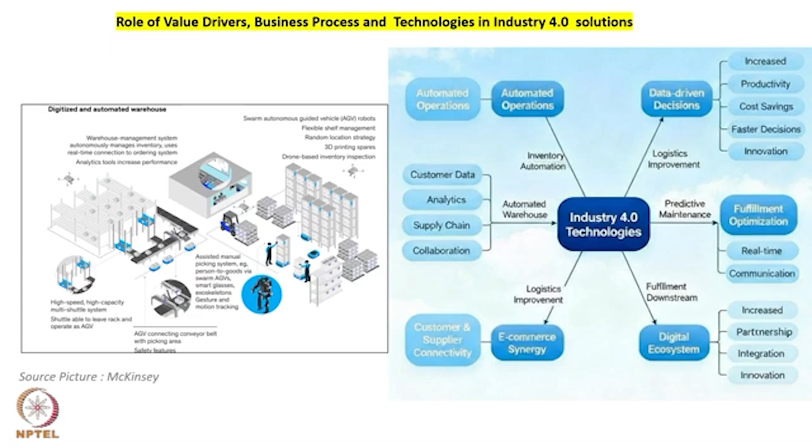So basically, in the last lecture we have seen how important the value drivers are for defining the roadmap of an Industry 4.0 solution. Now I want to summarize that first lecture in the form of what we have learned, because we are going to use this learning in today's session of designing the frameworks of Industry 4.0.

So in the first section we have learned the value drivers which I already discussed in that example: efficiency is one value driver, quality is another driver, cost reduction is the third driver, which is being enabled with the help of certain technologies like AI, IoT, predictive maintenance, etc.

Then value drivers like improving the customer experience, improving customer loyalty, and personalization. This kind of value driver is being enabled with the help of software like product as a service, or CRM, or some other technologies which you will be studying.

There is a third category of value drivers: partnership, collaboration, and innovation. For that also we have enabling technologies and methods, and one of the important methods is APIs, which connect with the partner networks.

Then another value driver is decision precision, how well we are taking decisions, whether our decisions are really going to work for the business, agility. So these kinds of value drivers are being enabled with the help of data insights.

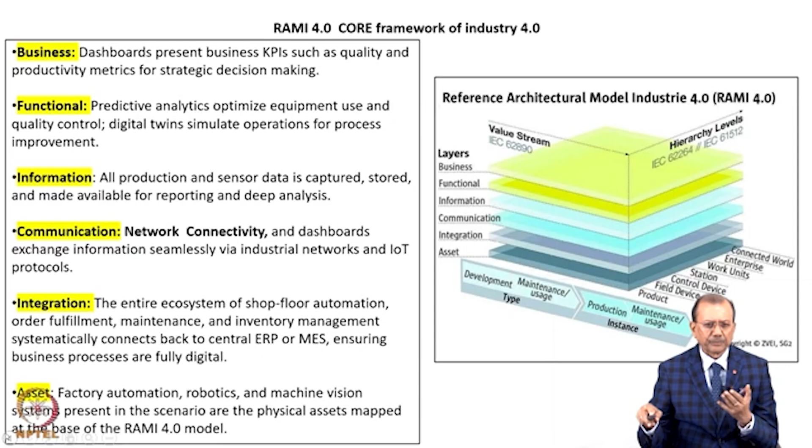So if you say you have to develop an Industry 4.0 solution, this RAMI 4.0 framework is one of the most critical and important frameworks to understand. You may have to see whether your solution is addressing all these layers or not.

So to qualify this with the help of some examples, I'm again bringing the example of automation of the warehouse, which I have already explained. If you like to plot all 6 layers, you can see what kind of manifestation of automation will happen for the automation of the warehouse - it is written in the second column.

Like in case of information, data models have to be formed, and we may also have to have optimization of the equipment. We have to optimize the equipment. Similarly, in case of functional, warehouse control system has to be used over here.

So this is an indicative list, not a complete list. Just for the sake of explaining this concept, I have put some of these processes, automation methods, enabling technologies, or Industry 4.0 technologies, and sometimes solutions, which have been listed out. So if you like to implement Industry 4.0 with the help of RAMI 4.0 for this sort of automation warehouse scenario, these kinds of actions are required. For every layer, you have to select and understand what kind of automation of processes is to be done, and then which kind of technology is more suitable.

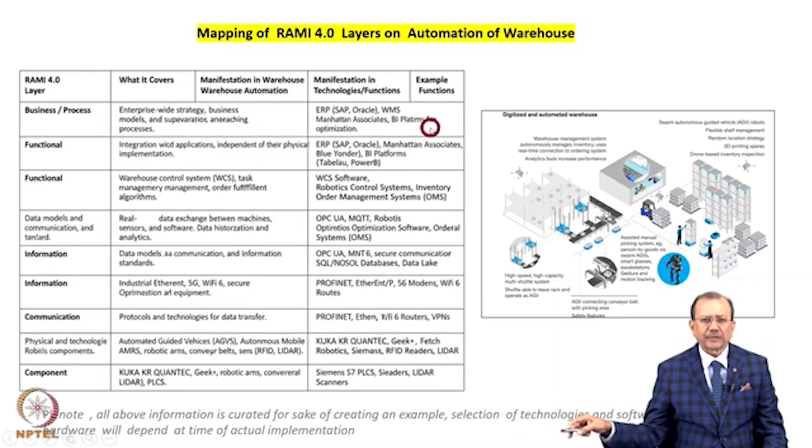Next example, using the same approach as earlier: in case we want to automate quality, safety, and productivity in a factory environment, we need this kind of technology drivers. Like in case of improvement of quality, we have to have augmented reality glasses to assist factory workers, and machine vision for predictive quality control, which is very important.

So if you like to plot RAMI 4.0 again on every action or process of this scenario, on the RAMI 4.0 layers, this kind of scenario can be understood. Like for business, we have to define the goals and value chain. For functional, which kind of application services and algorithms we want to run. For information, what kind of data models we are going to use, and data exchange protocols.

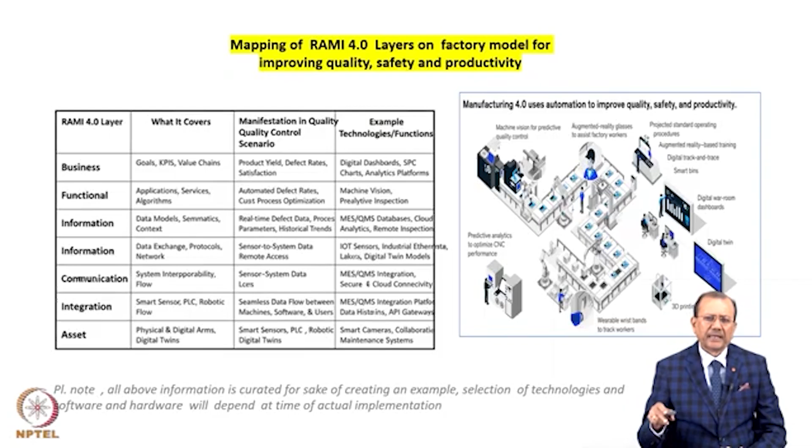So I have prepared an indicative list of what is to be covered for each of these layers, and then to enable that, what kind of technologies are required, listed in the second and third columns. Solutions, technologies, and processes are listed in the second, third, and fourth columns. So that is the implementation of RAMI 4.0. Basically, RAMI 4.0 provides you a set of guidelines: if you want to implement Industry 4.0 in any scenario of your business or manufacturing or whatever, you have to work in all these 6 layers, then only a complete solution can be arrived at.

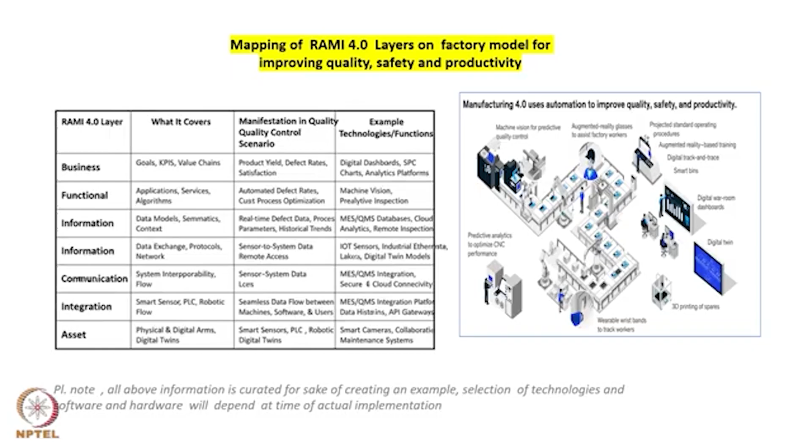Now I will discuss another very important framework, which I call the business framework. McKinsey developed this framework quite a few years back, and here McKinsey discusses the value drivers, like supply and demand match. These are the 8 value drivers which McKinsey discusses that if you like to make a framework or implement some Industry 4.0 solution, you have to work on these kinds of value drivers.

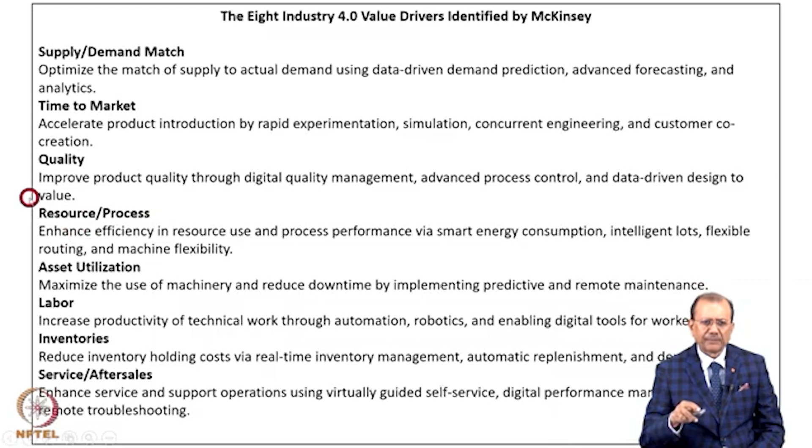So supply and demand match, time to market, quality improvement, resource and processes - we will see with examples all these value drivers. Asset utilization: maximize the use of machinery. Labor: increase productivity of technical work through automation. Inventory: reduce inventory holding cost via real-time inventory management and automatic replenishment. Service and after sales: enhance service and support operations using virtually guided self-service, digital performance management, and remote troubleshooting.

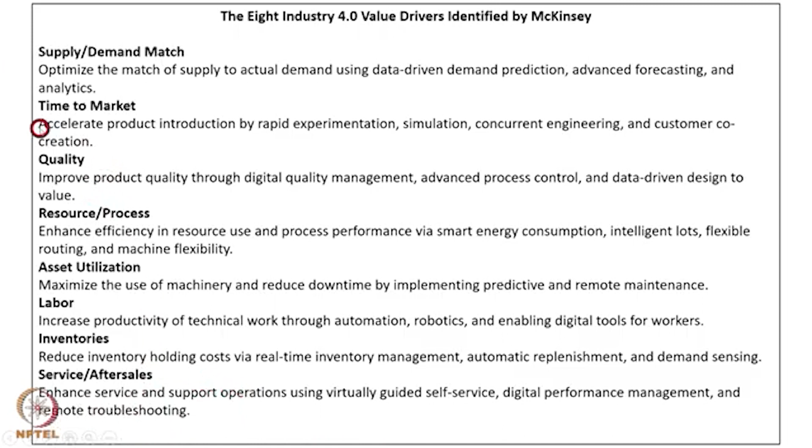These are all indicative, but these are the drivers McKinsey has provided in its framework. This is the framework which McKinsey released a few years back, and they still follow this framework. Though it's quite old, it's still quite valuable, that's why I'm presenting it to all of you. You can see there is a layer of value drivers, and these value drivers are enabled with some kind of technologies and software. So now we'll see the actual implementation.

So a simplified view of what you are seeing in this framework, I have tried to make it in table form. The value driver: supply and demand. You will see in that framework, data-driven demand prediction is one of the important levers, and how it can be enabled - with the help of AI, ML forecasting tools, and digital analytics. Supply and demand is a very important value driver. Which are the levers? Industry 4.0 levers make it important for the supply and demand match driver: one is data-driven demand prediction, and then we have some tools, S&OP and APS.

Then we have to enable this, to actualize these kinds of levers, with technologies like artificial intelligence, machine learning, or digital analytics platforms - there are a couple of digital analytics platforms available. IoT sensors will be required. Time to market: rapid experimentation, simulation, concurrent engineering, customer co-creation.

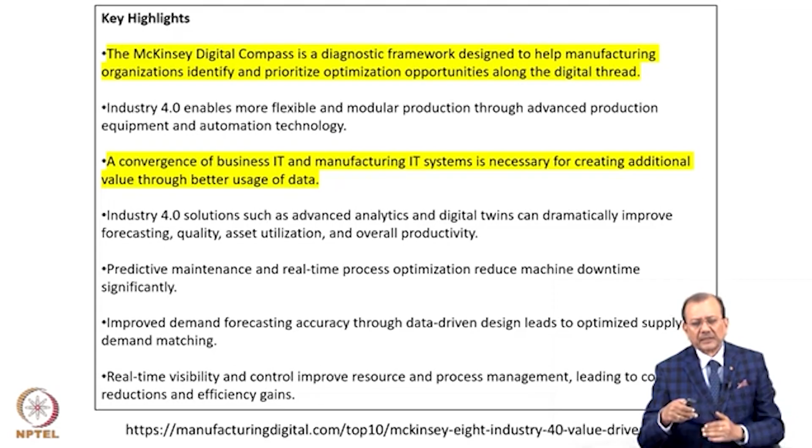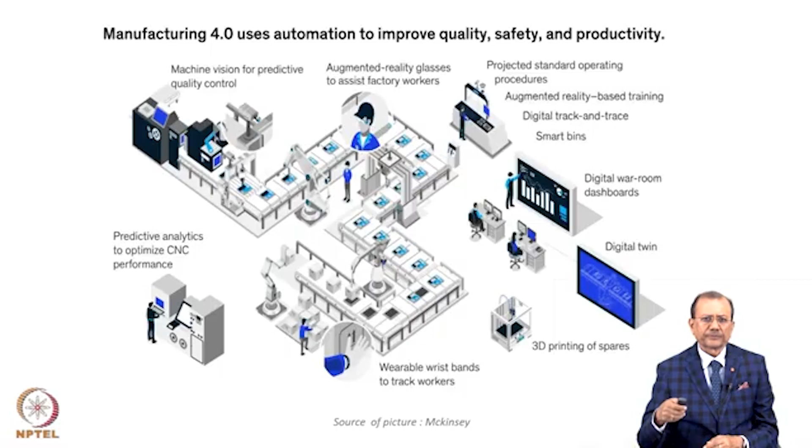Now if we again like to see the implementation of McKinsey framework - same example which I referred to earlier - this is a manufacturing process use case: automation to improve quality, safety and productivity. This will be the indicative scenario when we look at the implementation of the McKinsey framework.

Like for quality, you need the quality management software, and for that we may have to have some processor, some technologies like machine vision and IoT sensors, etc.

So now the question comes, how does the McKinsey framework relate to RAMI 4.0? Are they two different buckets, or do they have no relationship? So I tried to introspect that - I tried to relate them at the process level, at the utility level, and you will see that in a table.